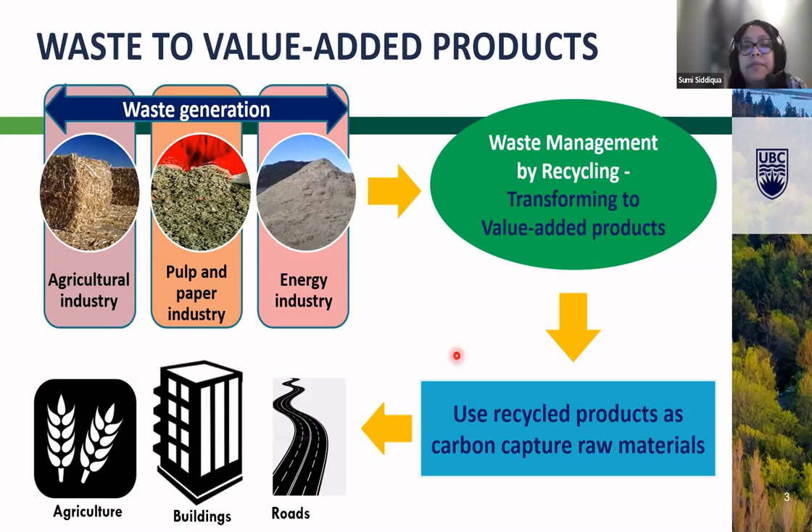This waste management and recycling is the goal, and transforming them into value-added products. How do we do that? Use this recycled product as carbon capture raw materials. We want to target less use of cement, as Professor Das was just mentioning, and therefore it will have less impact on the environment, and find a solution where we can apply those materials. It can be either applied in the agriculture industry, going back as a composting material, or making building materials, or using it for road subgrade and stabilization.

So when we look into the waste stream coming from the pulp and paper mill, we just looked into what would be the different sources. We identified a lot of different sources, but my goal was to look into the waste residue, that solid waste residue that we need to use for construction applications.

So we have identified three different types of ash. One is precipitator fly ash, which is finer fly ash. Then we also find the multicyclone fly ash. And then the last one is the bottom ash. So what happens with that?

This solid waste residue that is produced in the pulp and paper mill, a minimum of 1 million tons of ash produced per year in Canada, and it costs 20 to 50 Canadian dollars per ton to dispose of this fly ash. So we needed to find some application for these mills because they are losing money dumping this waste material in the landfill.

On one hand, they are losing money for disposal, and also there are environmental impacts because landfill space is valuable, especially in North America, and finding a good space for landfill is always a challenge. If you are filling up those landfill volumes with large volumes of this waste residue, then we are even making environmental impact in the long run in a negative way.

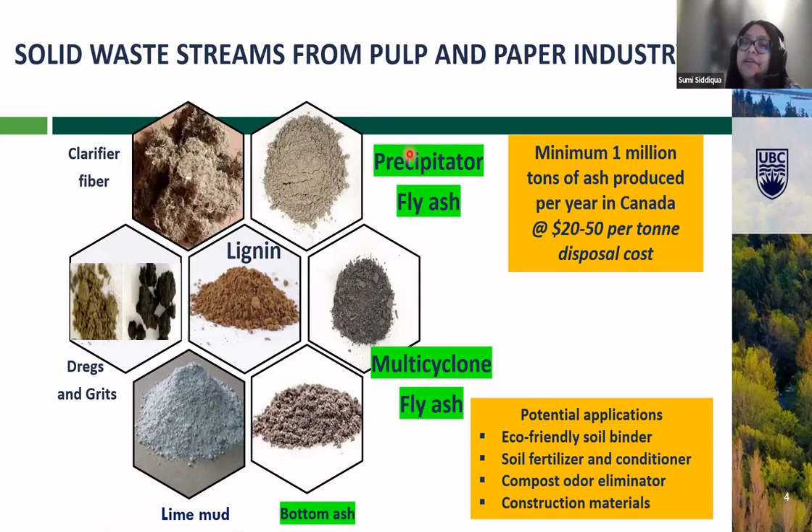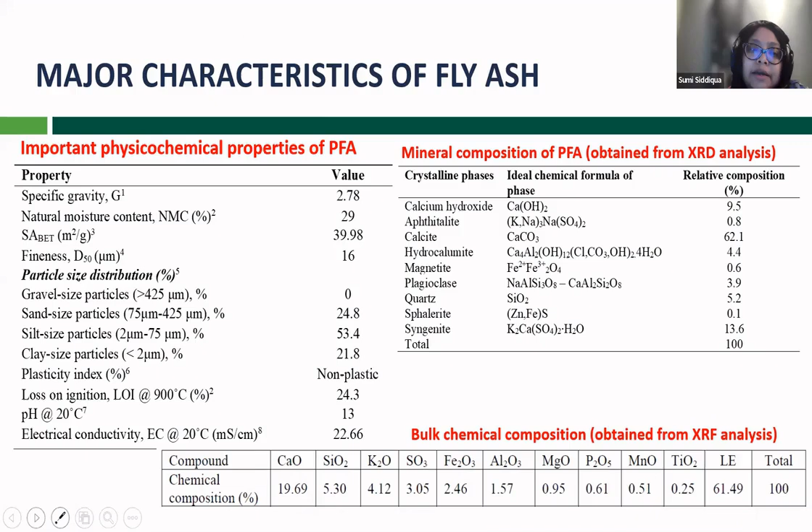So this whole characterization of the fly ash, and the fly ash I'm talking about is the pulp mill fly ash - we understand what properties we are dealing with, and then we looked into that in terms of microstructure. The second thing is about the toxicological properties, because these are the two things we have to look into if you're thinking about using them as a construction material or road material.

Leaching would be an issue in the future, so we have to know whether the toxic properties we see in this material are within the limit or standard provided by the Canadian Environmental Agency or the US Environmental Agency. So those two fly ash types, the precipitator fly ash and the multi-cyclone fly ash, we characterized using XRD, and we also looked into the toxicological properties and identified them with respect to the BC water quality guidelines for agriculture and the BC water quality guidelines for aquatic life.

So these are the two reference points, and we saw that most of the properties are way below the standard given to us. We also compared that value with respect to Portland cement, and most of the heavy metals we found in the fly ash were either close to cement or much lower than cement properties.

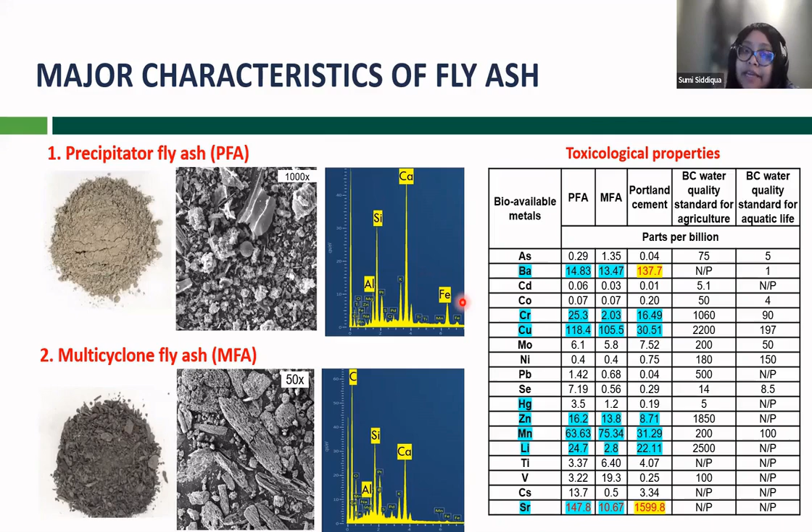So this information gives us a very strong feeling about the material, and we were excited to take this material into the next stage. So there are a few important parameters we have identified from that.

We have looked into three different types of fly ash from the pulp and paper mill. The first one is the precipitator fly ash, which has the most matching properties to Portland cement. Untreated PFA was found to be the best candidate for binder application in road subgrade and rammed earth. So PFA was the candidate material for us.

The second one is the multi-cyclone fly ash, which has very high porosity and low cementing properties. It is best suited for applications related to carbon capture technology and soil amendment composting, because it's more like a granular material. And then the last one is the bottom ash, which is a good substitute for coarse and fine aggregates.

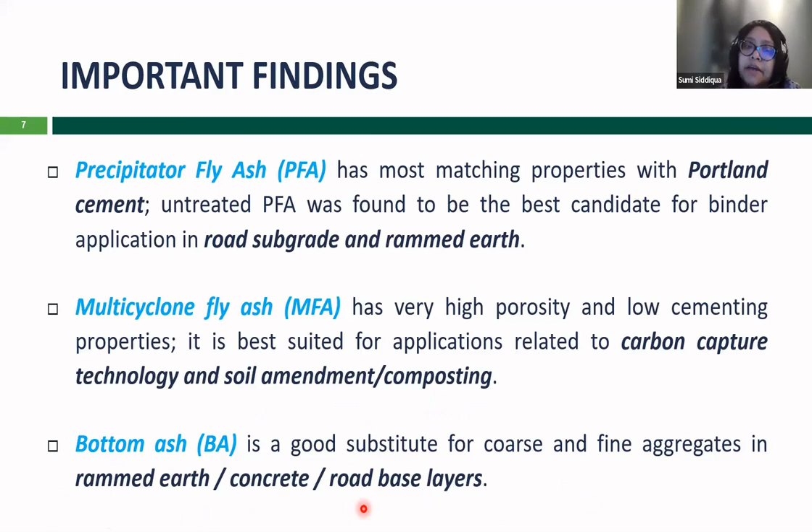This is used in rammed earth, concrete, and road base. It's not providing the strength or anything, but it was helping us to support the fly ash and other materials that we are using in the rammed earth or road subgrades.

By looking into those conclusions, we have come up with a few objectives in this work, collaborating with pulp and paper mills in British Columbia. We looked into the characterization and toxicological analysis of 3 different types of fly ash: multi-cyclone, precipitator, and bottom ash.

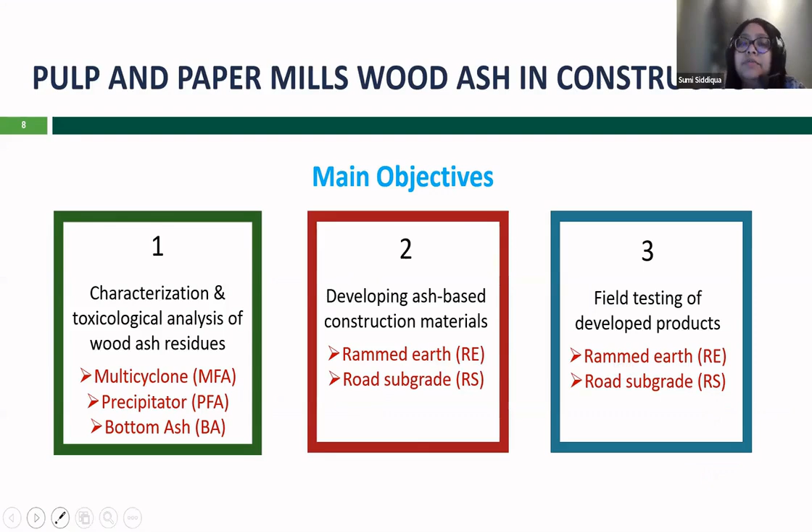The second objective is to develop ash-based construction materials for 2 applications: rammed earth and road subgrade. We then looked into small scale field applications related to rammed earth construction and road subgrade construction. At the beginning of the project, we searched for an industrial partner who would be excited to test our materials at field scale, giving us a better understanding of field application impact in real construction situations.

Starting with rammed earth housing - why is it important? Once we have a good understanding about rammed earth materials, I'll talk about backgrounds, traditional rammed earth materials, and how we can improve them for use in housing construction. The reason is that in our areas, in the northern side of Canada, it's hard to have a good supply chain in place.

Therefore, local communities are interested in building with whatever materials they have locally, identifying waste streams available to their community, and establishing a housing system that is more environmentally friendly, because people would like to stay close to nature rather than use the typical high strength construction we use for high-rise buildings.

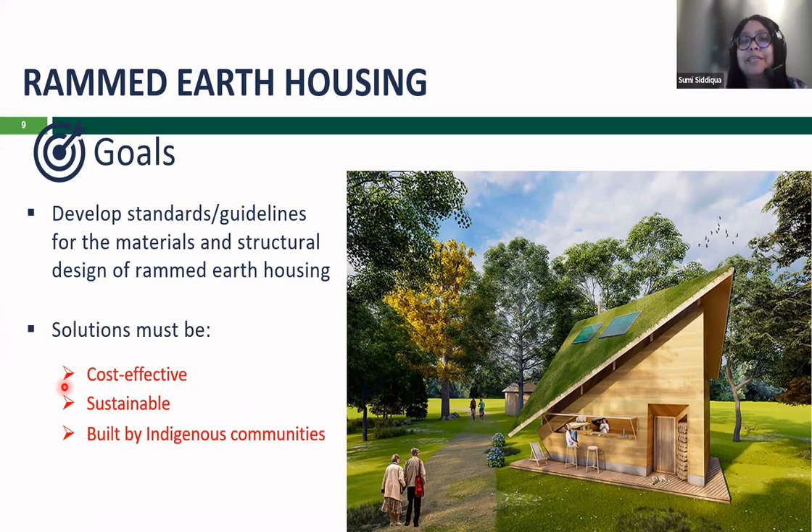So we need solutions that can be cost effective, sustainable, and built by indigenous communities. That's our overall bigger idea about working with this rammed earth housing.

Traditional rammed earth material has low environmental impact because it uses naturally available products, and it provides high hygrothermal performance. Rammed earth construction possesses low embodied energy and high recyclability. Durability is a major concern for traditional rammed earth, due to water attack and frost damage in wet and cold regions - especially in Canada, with huge temperature changes between summertime and wintertime, and moisture changes based on that.

Variety of raw materials is another challenge, because every time you have to understand the raw materials, their sources, characterize them, and learn about their compaction methods and exposure to water ingress. Those are the things that create complexity.

But if you look into this passive house - we call it hashtag passive house, net zero, rammed earth, and sustainability - this rammed earth house is built in Summerland, a small city in British Columbia, 50 minutes drive from the UBC Okanagan campus. So we compare the global warming potential for concrete versus rammed earth material.

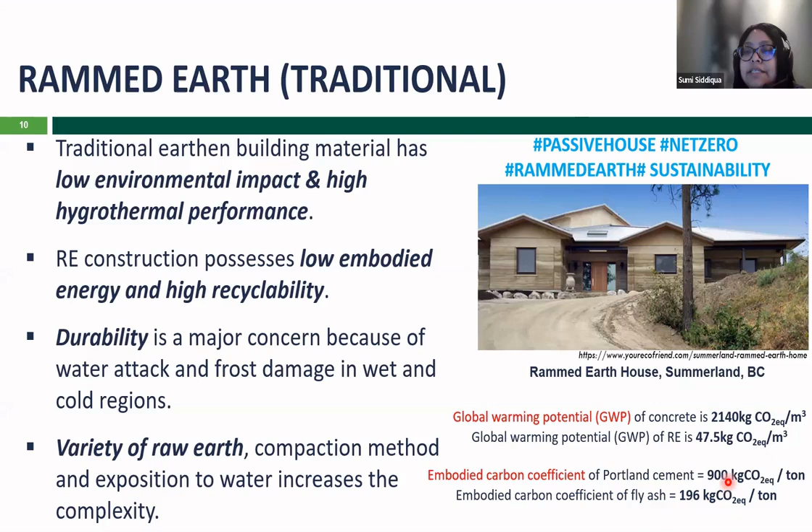Another parameter we look into is the embodied carbon coefficient, which again is much lower for rammed earth. This parameter is calculated per cubic meter of material made from concrete versus rammed earth product - traditional rammed earth product - and also compared with Portland cement and fly ash. This fly ash value comes from typical coal industry fly ash, not from pulp and paper mill fly ash.

So how do we look at rammed earth in the modern industry? In modern industry, we look at rammed earth with cement stabilization, because that's the typical approach to improve strength. It provides good durability but reduces the product's sustainability, since the goal of using rammed earth is to use it as a natural product.

So we don't have to worry about that sustainability component normally, but if you want to increase strength by using cement, that impacts durability positively while reducing the sustainability component. The inherent sustainability is compromised by modifications using carbon-intensive materials like cement.

Key challenges is to develop a novel rammed earth technology with significantly low carbon impact and improved climate resilience. So we have to look into the low carbon impact and the climate resilience material.

And this is the wall constructed at our campus, a rammed earth wall in the UBC library building. This wall is not for strength bearing, it was only just for the decoration purpose, but it was built out of natural material, reduced cement use, and also just to remind everyone about the nature, close to nature, stay close to nature.

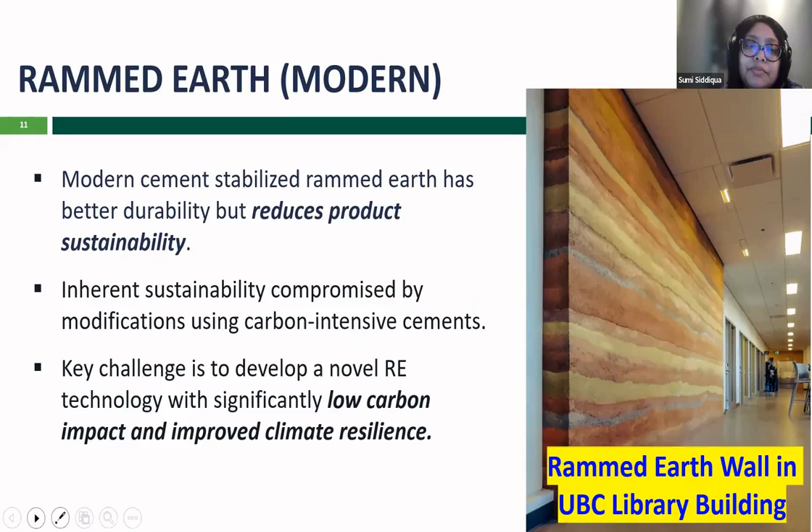And the sustainable, go for sustainable construction. So the experimental work we have been doing in our lab have made major attention over the period of time, because this is a waste product that British Columbia, government of British Columbia, industry of British Columbia, they are looking into find a solution. So we have our works.

Have been noticed by many. Now we are coming to the little bit of newer component that we want to address, the durability part. Still, we want to use a small amount of cement rather than the higher percentage of cement that modern rammed earth product uses. But we want to see, can we use this fly ash and look into the thermomechanical performance?

And we have used modified mold to test those kind of parameters that is important for the durability point of view. So this is the solid rammed earth specimen for strength and durability analysis.

We looked into the durability and strength analysis and also the freeze thaw analysis of this material over a period of time. Then we have used this hollow rammed earth specimen for thermal analysis and used the environmental chamber with time lag and decrement factor, design with this sample, and also use the thermal conductivity apparatus for the thermal conductivity and a specific heat capacity.

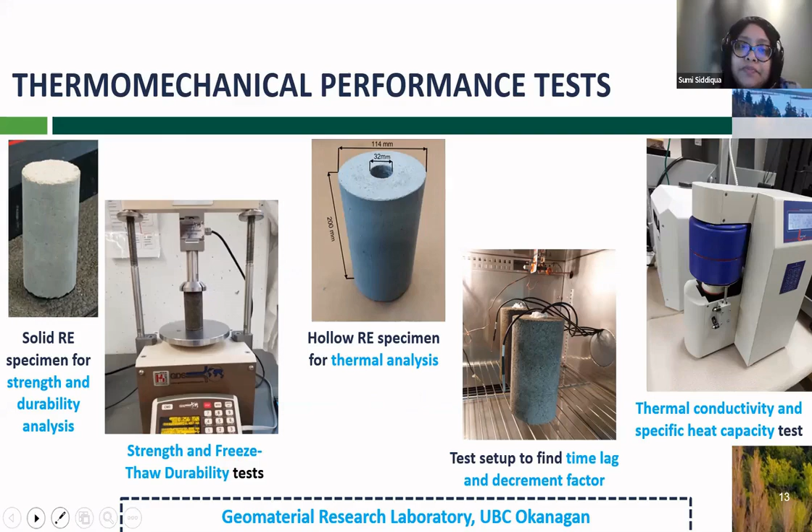Now, looking into the microstructure, we have to look into more than general microstructural analysis we do. When we make the modification, of course, we have to look into the XRD, then we have to look into the SEM, FTIR, and then we have to look into the chemical composition and the leaching, so that therefore we run the elemental analysis, ICP-MS, ICP-OES, those kind of tests, and I want to acknowledge those laboratory at our campus for the trace element research.

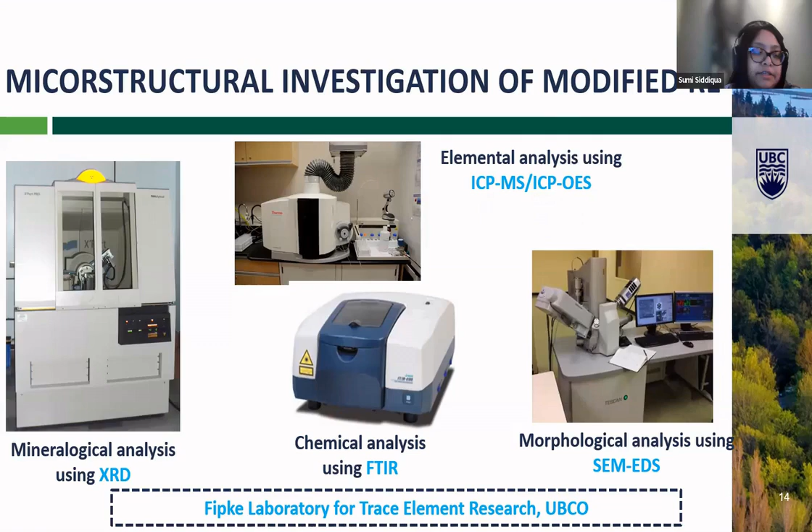So if I just summarize what we have achieved by doing all the tests into two combined picture, because there are tons of data to share, but I'm just going to summarize them as a whole so that we can understand the overall outcome of this rammed earthwork.

So we have used the fly ash as received, and we have used some calcium bentonite clay as additive, and we have looked into the UCS data, unconfined compressive strength, and we have looked into a several combination. So as you can see in our x-axis, we have a several combination of the materials. So I'll just explain what are those materials are.

So the first one here is SC, which is 10% cement, Portland cement, and that's how we are just defining them, 10% Portland cement. And then we have the S referring to the raw material, the sand material that we use for building those rammed earth. Then we have SPC 5.5, that means 5% fly ash from our project, and the 5% cement.

Then we have SPC 10.5, that means 10% fly ash and 5% cement. Then we have 20% fly ash and 5% cement. Then we have that.

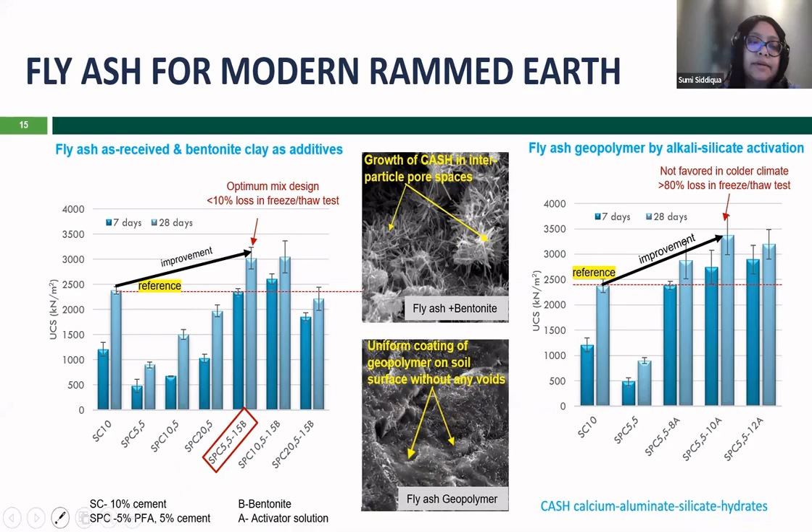Now for microstructure, we see the growth of CASH in the pore space, which is calcium aluminate silicate hydrates. That's what we see with the fly ash and bentonite, and the fly ash geopolymer - a uniform coating of the geopolymer on the soil surface without any void. That's the impact of the geopolymer.

Now we ran a test sample in Lake Country, another city beside Kelowna. A contractor who was building a rammed earth wall got a client in Lake Country and used our recipe to construct the wall. The only observation from this, after a long period of time since this was done in 2021...

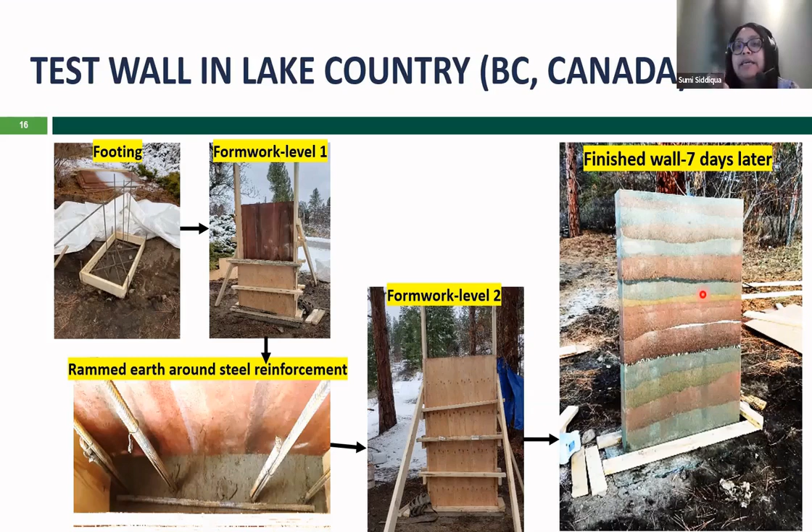When we constructed that, it was fine, but over time, because of having some bentonite in this material, it started to show long-term environmental impact. Some small cracks started to develop after it faced several natural freeze-thaw cycles from the weather.

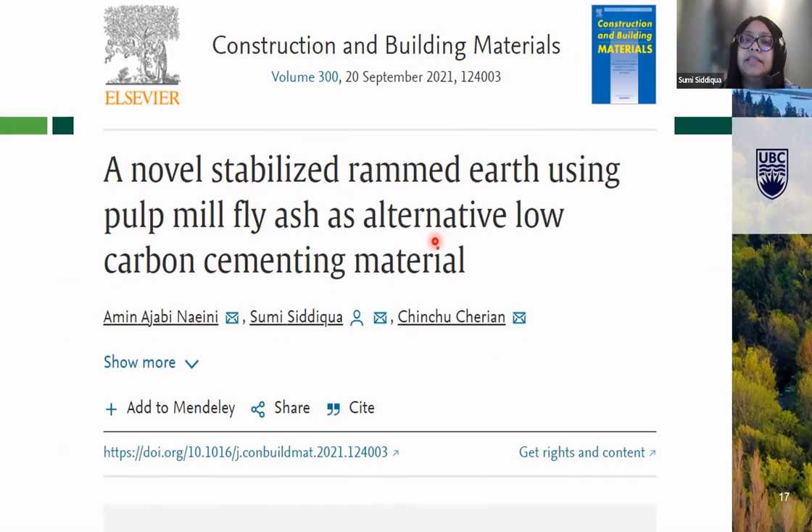This is a work published related to rammed earth using fly ash as an alternative low carbon cementing material. If you're interested in reading more about this data - the initial data I just showed, other than the thermal data which is under review right now - you can look at this paper.

Our long-term research goal from this rammed earth construction technology is to preserve and improve its strength, meaning durability and sustainability are important, and to overcome its weakness, meaning we want to customize and make it flexible.

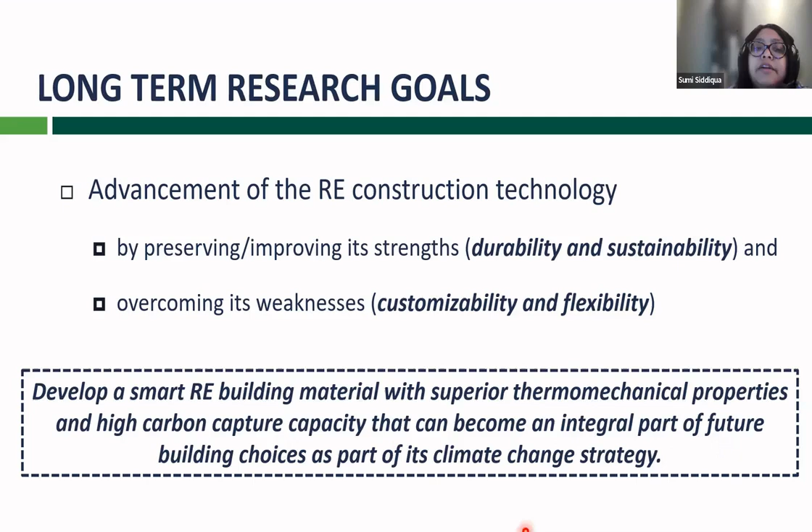If you can pre-build panels using 3D technology, they can be used anywhere. So they develop a smart rammed earth building material with superior thermomechanical properties and high carbon capture capacity that can become an integral part of future building choices as part of its climate change strategy.

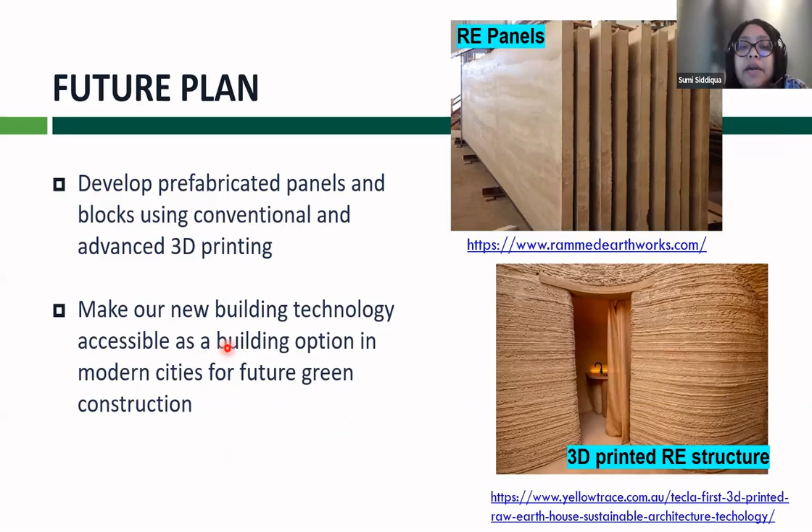That's what we aim for: develop prefabricated panels and blocks using conventional and advanced 3D printing, making our new building technology accessible as a building option in modern cities for future green construction. Develop design and performance guidelines, because that's what drives people toward the technology, and help make this innovative construction more available to the mainstream building industry, potential local contractors, and also the remote communities I mentioned.

But their approach should be different. They don't want to go with prefabricated panels - they want to build at their own facility based on their own sources.

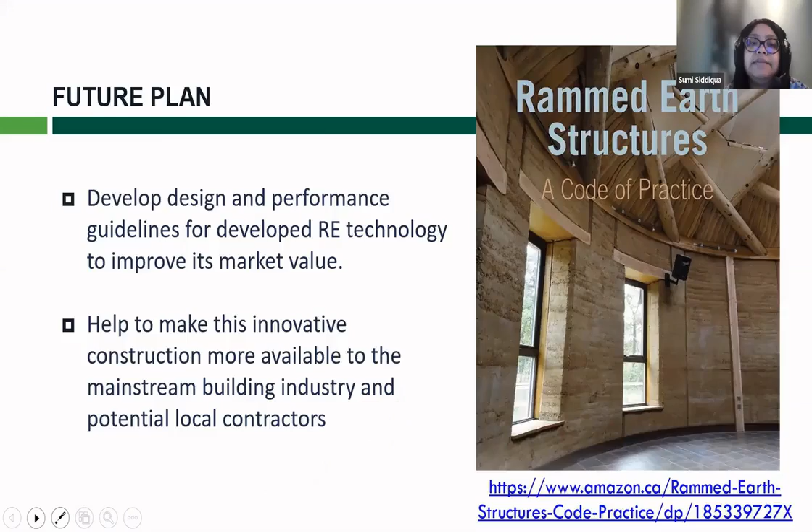The major research finding from this rammed earth project was that we've been able to replace partial cement with wood ash, improving the thermal properties of rammed earth, but this compromises both strength and durability. The combination of fly ash and calcium bentonite improves mechanical properties - compressive strength and freeze-thaw durability - above the levels of standard cement-stabilized rammed earth material.

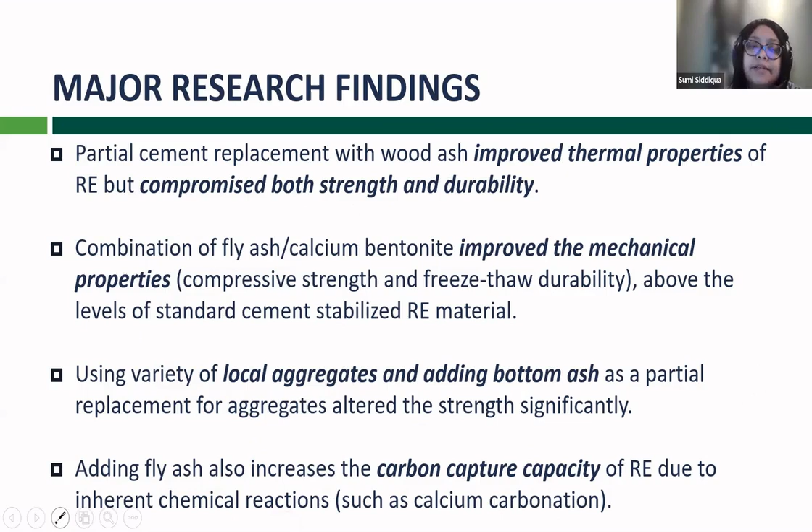Using a variety of local aggregates and adding bottom ash as a partial replacement for aggregates altered the strength significantly. We also saw that adding fly ash increases the carbon capture capacity of rammed earth due to inherent chemical reactions such as calcium carbonation. So these are the findings from the rammed earth work.

Now I'll move on to the application related to roads. In Canada, we see climate change vulnerability on our road infrastructure. This picture was taken from Yukon, one of the northern provinces. The ice wedge in the active layer started to increase because of the permafrost.

That means the soil is not frozen for as long a period as it should be, and that is increasing the active layer - meaning it started to become active and melt.

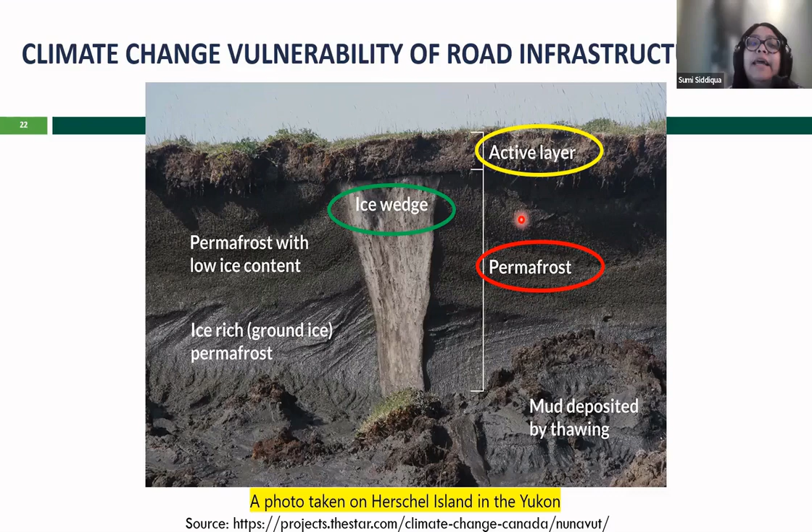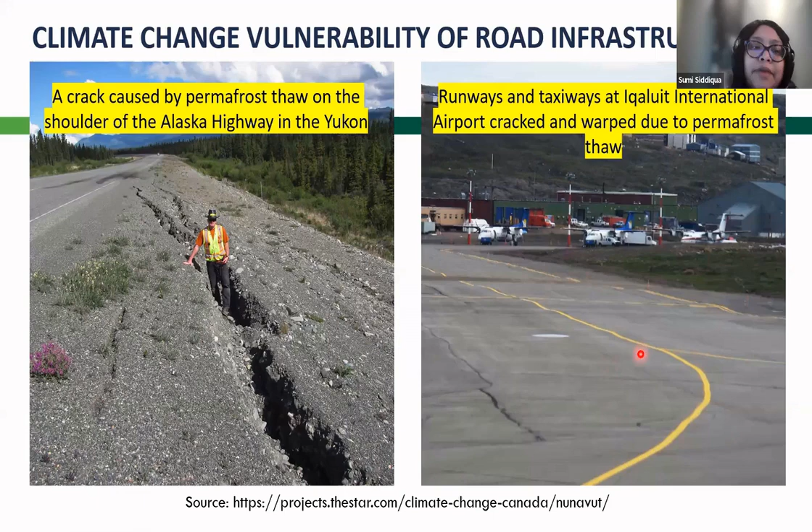So those are the reasons we are looking into how to improve the quality of the soil underneath, so that we can have better road infrastructure, which is key for many activities, especially for the food supply chain. The road infrastructure needs to be intact in Canada.

So what we used: we looked into the optimization of the fly ash binder for subgrade. I'll go through again how the compressive strength changes over time with respect to different combinations shown here - 7 days UCS, 28 days UCS, and the dotted points are the UCS ratios between the 28 days and 7 days.

So we have untreated fly ash, with 3 different combinations: 10%, 20%, and 30%. For this type of fly ash, you see we have MFA and also PFA - we used both types of fly ash from the pulp industry, the multi-cyclone and the precipitator fly ash.

So the first one here is MFA, the multi-cyclone fly ash. Then the similar percentage of the precipitator fly ash, without any treatment. These are the untreated ones.

These are the most valuable ones because if you don't have to treat them, it's more cost effective for application and easier to use. The third one here is a combination of multi-cyclone and precipitator fly ash, but it doesn't help much, as you can see from the UCS data.

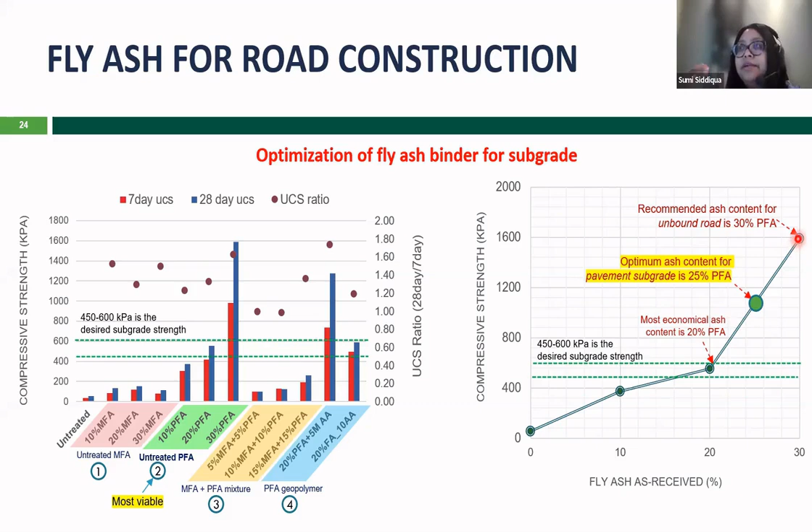And we also recommend an ash content for unbound roads of 30%, because we don't have to go for the final development of the roads. For unbound, unpaved roads, we can use 30% fly ash.

And that work was published in the Journal of Cleaner Production. You're welcome to have a look if you're interested in the subject.

Now we are looking into this work, which also grabs attention because we are talking about taking fly ash, not sending it into landfill, but making it available for other uses. We have demonstrated 2 different types of applications: one is for rammed earth construction, which grabbed a lot of attention from the local community.

And the second one is the road subgrade. For typical road construction, the surface layer we are looking at across British Columbia or all over Canada - based on temperature changes that have impact, your subgrade material needs to be treated so that you can find industrial byproduct-based sources to use and treat them, rather than replacing subgrade materials with foreign materials, which can be very costly. So that's what we have here.

Okay, so now we are looking into a test site for service road construction in the Kamloops landfill area. The reason we picked this site is because it's one of the landfills for one of the pulp mills - the closest one to our campus in Kamloops - and they were building a connecting road at their site.

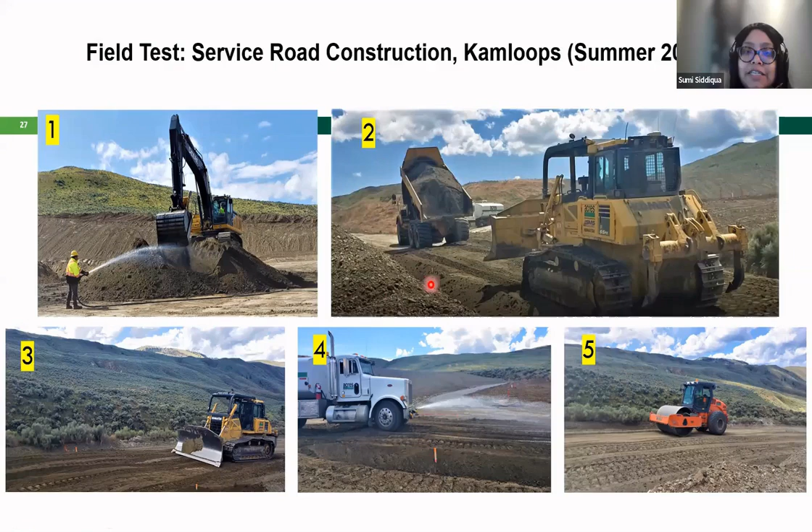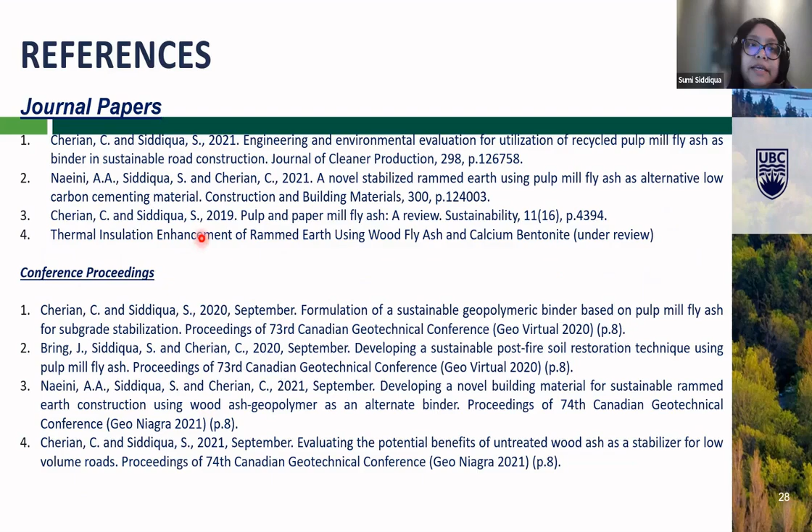One of the items I want to identify here is the thermal insulation enhancement of rammed earth, which is currently under review. Hopefully we'll hear about that article soon.

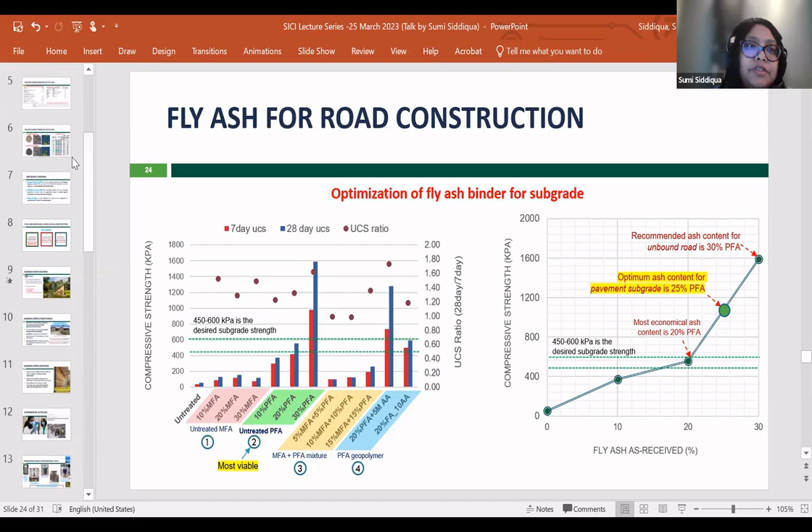There's another question: How do you quantify the percentage of each mineral in fly ash? I've talked about this - there's a list of different tests you can do. XRF is the one which gives us the chemical composition. Mineral composition can come from XRD. So it's a combination of both - it'll give you a good understanding of all the minerals and the chemical composition.

How they are incinerating, it's not polluting anything, like in pulp when they're coming out of the industry. Mostly in my experience, in that area and around, I found lots of bad smells come out. But then in the case when they're going for incineration, they have got the internal plant for all the facilities, but then they produce a lot of waste, right? So they don't have that kind of storage facilities. They need to find a solution because storage is a big deal.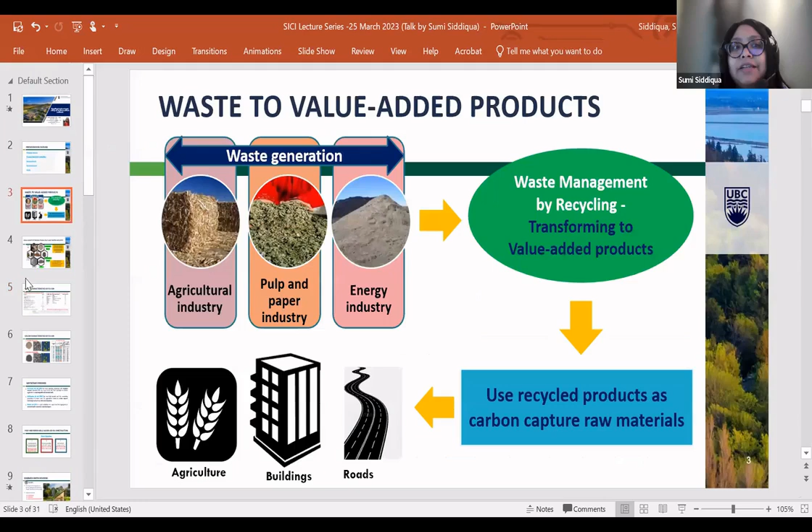If you produce 1 million tons per year in Canada, it's huge. If you don't want to use this waste, you can dump it in landfills. Canada has tons of them, but then you have to take them there, so transportation cost will be much higher. So that's not useful for those mills.

Another important component for this pulp and paper mill industry is lignin. So people are looking into lignin, how they can use that lignin waste in package production or even road pavement. I haven't worked with the lignin part, I just focused on the fly ash component. They produce different types of waste, as you can see from this diagram, so that can be a revenue generator for them if they can find a good solution for its use.

Yes, this lignin is also coming out as a byproduct from their plant. Yeah, yes, okay, that's correct. So then you said 2 types. Okay, one more question there.

Andhika Saputra: How about mineral content of MFA?

We didn't do all the mineral content of MFA because we already found out that PFA is more attractive for us. But if something comes up, we can always do that. It's not a big issue, we can just run some XRD and then find out. Yeah, that was the reason we haven't.

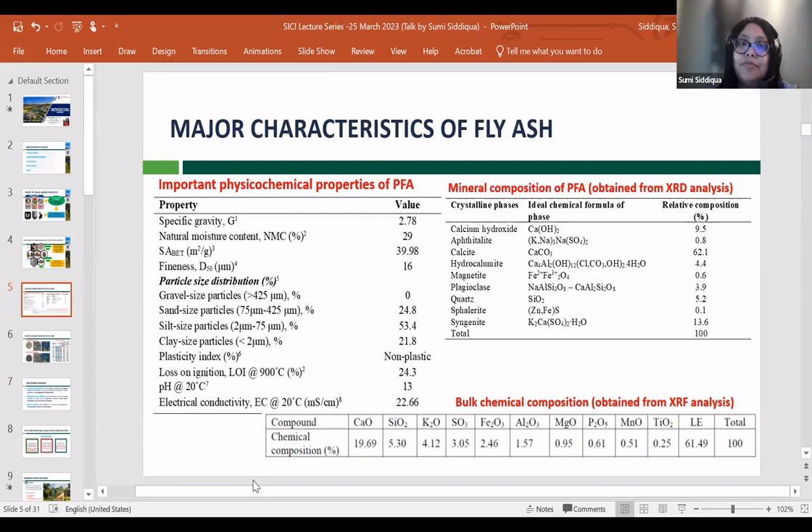Yeah, because shear strength is a detailed geotechnical property, which is the next step. If someone is going for the application, you need to go for all the geotechnical element testing. But all those material improvement characterizations require one test, an index test, and that is the UCS test used worldwide.

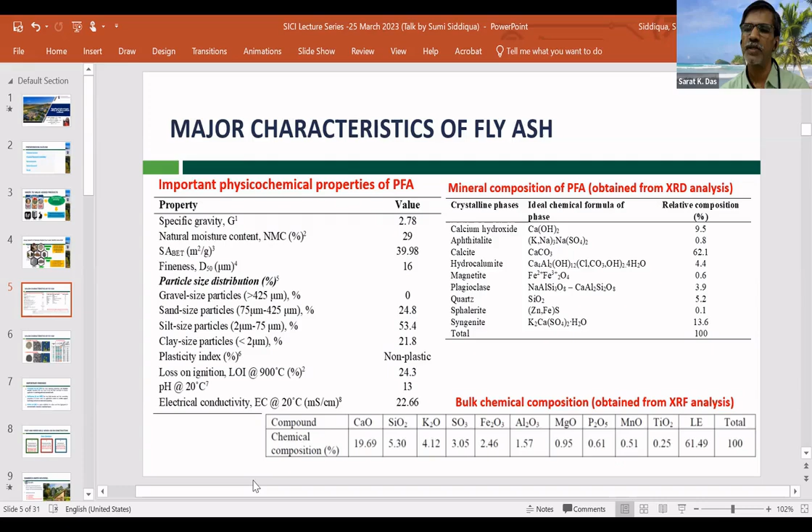Yeah, yes. Then next is Avik Kumar Mandal: it's an interesting, informative, and thoughtful talk. Professor, was there any study on the use of bottom ash, I mean, for stabilization of the expansive clay subgrade of road?

Okay, we just use the bottom ash to supplement and replace the voids, like instead of using other kinds of aggregates, we just try to use that bottom ash as a different, either it is rammed earth or the roads, we have used it as a supplement material, but not the main focus. In my lab right now, we are working in so many different areas with this fly ash. It's just like a gold mine for us right now. So we are using it for landfill, for plant growth facilities, for rammed earth, for roads, for carbon dioxide sequestration.

So many different applications, and if you just stay tuned and look into our publications, you'll see that we are producing many in that direction. Of course, there are opportunities. Yeah, these are really challenging. Yes, and this is also really interesting. That's what I always say: because we have no information, we are calling it waste. Once you get information, it will not be waste.

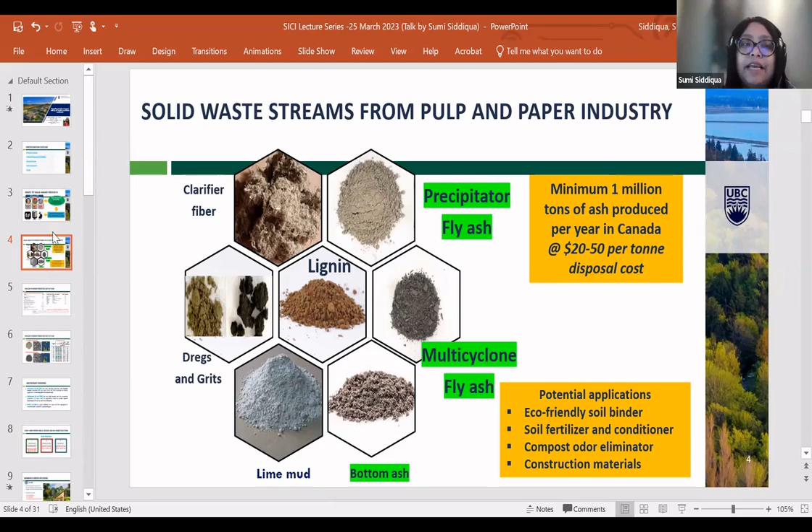One more question from Dr. Shurvi: Does fly ash help with thermal conduction in the fly ash-based rammed earth material? Yes, we saw good performance of the thermal properties. As I said, because it's under review, that's why I didn't share that data, but hopefully I can share that with you, Shurvi, after we have the publication accepted, for sure.